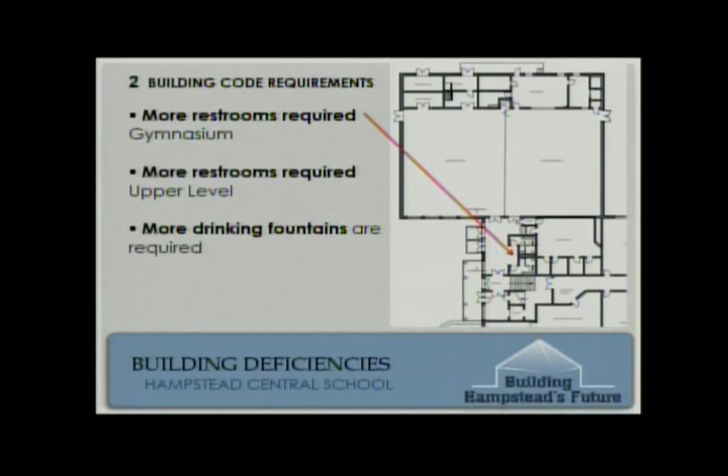The next phase under code requirements, we noticed that the restroom count didn't match what is required for today's standards, not only at the gymnasium, but also on the upper level of the school. And there are drinking fountains that are required.

Another thing under building code is that there is a known structural issue in the school. It's in the library, and it's been monitored over the years, but it continues to move. We put in another monitoring device just to be able to see how much movement we were getting, and we got some extra movement this year when the snow hit, we got some snow loads on it. But that's something that really needs to be repaired.

Hallways in the school are not currently up to fire code requirements. There really needs to be a fire partition on all hallways, and the doors need to be changed out to create a fire barrier, with door closers installed. So we're looking at a lot of money for things that aren't flashy and don't help educational needs, other than keeping our students safe.

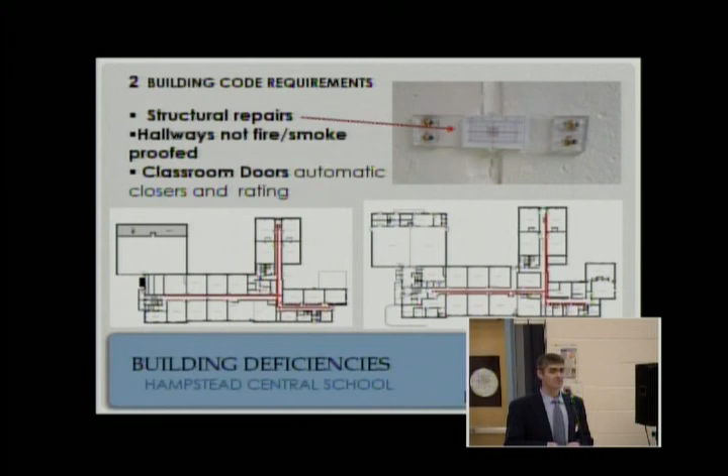In the 60s wing, building efficiency was a big concern. That entire wing is built off the back of the school, and it's uninsulated CMU, just a 1-foot thick piece of concrete between you and the outside. In summer it's hot, I was up there one day and it was 95 degrees in the classroom. In winter it's really cold, getting down into the 50s at night. They've been putting a lot of money into heating those spaces so students can be somewhat comfortable, but you still get drafts during the day.

Along with that, the roof needs to be replaced. The windows also aren't energy efficient, and you can get drafts off of them. There are stories of leaving a glass of water on the windowsill and finding it frozen the next morning.

Also under building efficiency, the portable classrooms are really thin-walled structures, so they're very expensive to heat, especially since each one has its own little heating system.

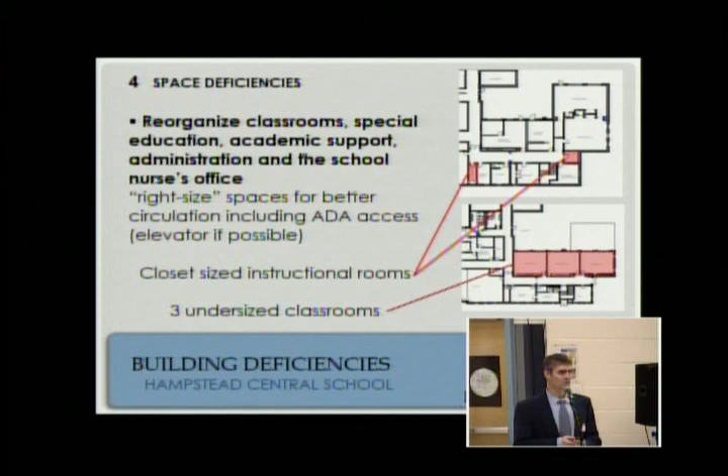Also, being able to reorganize the school so that currently the second grade is split between the upper level and the main level, and there isn't a lot of cohesion with the second graders. So being able to reorganize the school so that all class grades are together in one location, or as you work around the school, they're together.

Another space deficiency is how the circulation works for the drop-off and pickup. The portables in the back are in the way, so when the portables are moved, it frees up a lot more room for a much cleaner way to be able to drive back there, park, and pick up the students.

So the process kind of starts blending into what are the solutions to the deficiencies that have been found in the school. And if you've been in the community for a long time, you remember that since 2005 there has been a campaign to try and improve the school. I was able to pour through a lot of those reports from 2012 or 2010 through 2016, and nothing has changed in a lot of those documents.

Some things have been upgraded over time, but we went back and looked through all those conditions reports to see what was suggested then and what needs to be done today. So then we did our own facility assessment, and it brought out the items I just pointed out, but there's actually a whole list of a lot more items that are pretty much building code items.

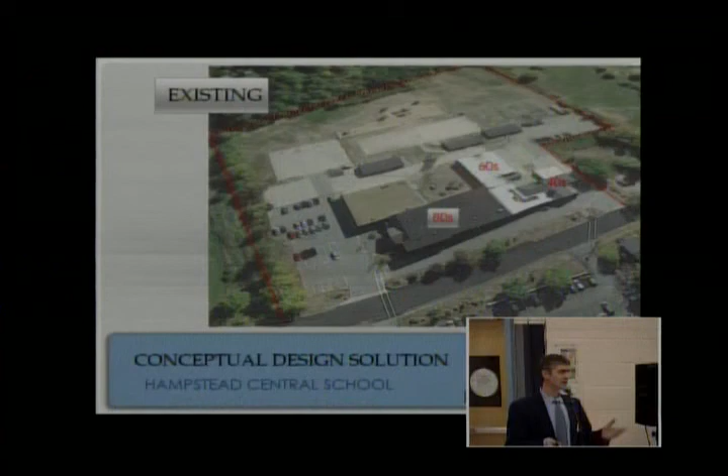So again, to orient you on the site, we have the 60s, 80s, and 40s wing, and this next slide shows the new components. In building new, what we came up with was taking care of, number one, the main entry. The main entry and administration is moved down to the front part of the school, and that's a new building component, about 2,000 square feet.

In the back of the building, because we wanted to do as much work in one location as opposed to building a number of different pieces around the existing site, we built in a library with 2 classrooms above, because then we can reutilize the existing library for classrooms. And then we brought the music out of the portables into the school and utilized a way to have the cafeteria and community room built off the backside of the gymnasium so that the existing kitchen can be used in the community room. So we're not building a whole new kitchen, it's just the new community room space.

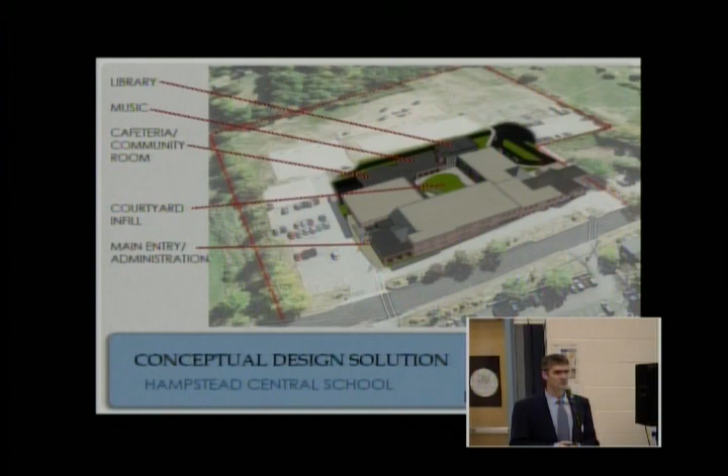And to orient you here at the front entry, you can see this is the new administrative and entry area.

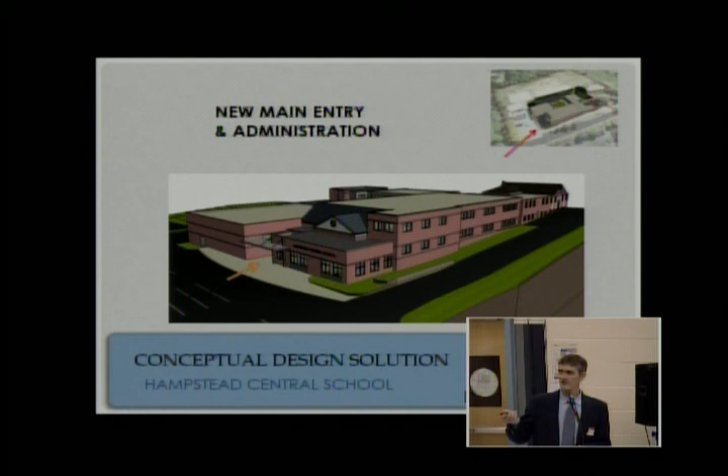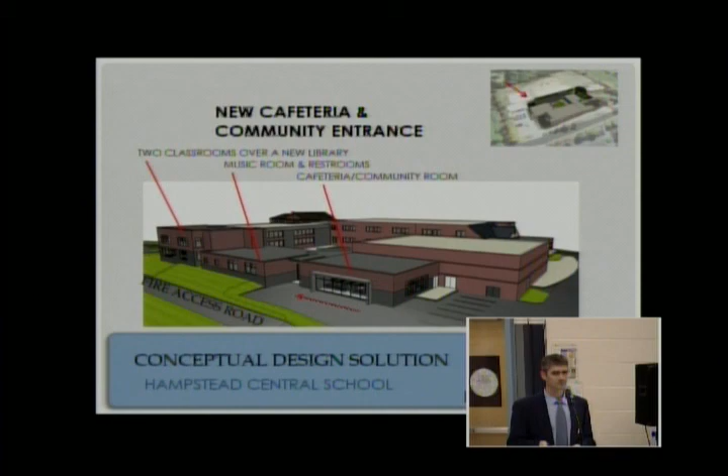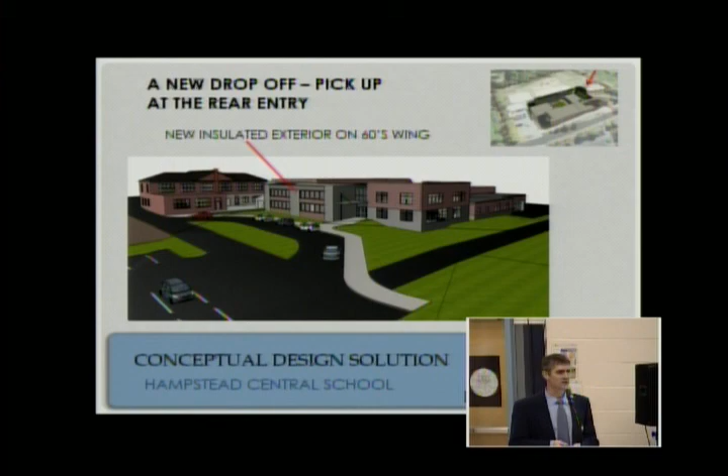This is the back of the building. On this site plan, here's the library with the 2 classrooms above, and the community room and music room that stretch across the back. We've proposed insulating that 60s wing so we can put a new skin on it. The interior is in decent condition and the square footages are right. It's just a matter of making it all look like it goes together, insulating that wing to make it energy efficient, and replacing the windows. Also, the rear drop-off has been reorganized so it looks and feels more like a drop-off, not just a paved area with painted lines.

In terms of new construction, this slide shows the new components in color. At the top of the screen, you can see those 2 classrooms - this is the upper level. There are 2 4th grade classrooms added to the back, right over top of the library, a set of bathrooms, a music room, and the community room. You can begin to see a big, circular path through the school. We have to put in an additional elevator, and in orange here, you can see the new front entry, which now blocks off and creates a controlled access point to get into the school.

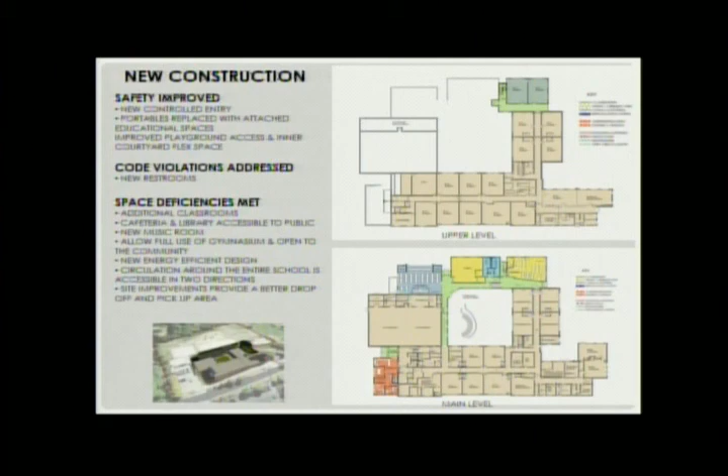So what we've improved here is the safety, the code violations, some of which were restrooms, and we've addressed the space deficiencies with the additional classrooms, the cafeteria, the library, and the music room. All of this leads to a better learning environment for the school, but it also lets the community utilize these spaces, because we've picked up this courtyard space with a little amphitheater, which would be a nice function space not only for students but for the community in the summers.

This slide shows the areas that are remodeled. It's kind of hard - the remodel really goes throughout the entire school, but these are some of the larger components. You can see how we've put a new skin all the way around the 60s wing, split the 3 small classrooms to make 2 appropriately sized classrooms, and divided the library in 2, where it was originally divided, which takes care of the structural issue. We have some structural issues to take care of directly underneath that in the lower level.

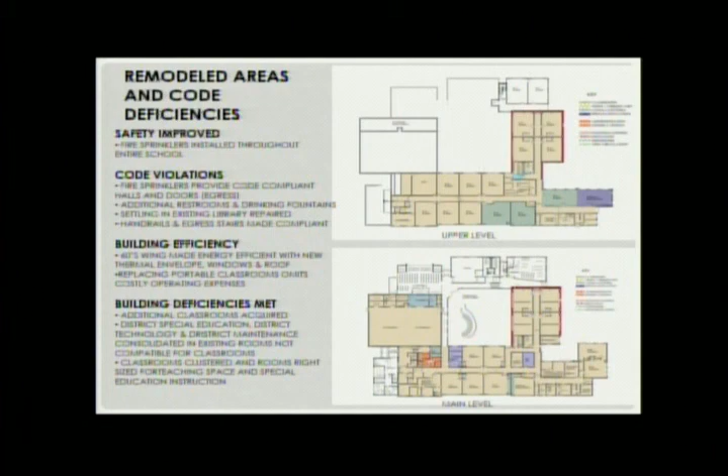We have the nurse's room, the kitchen for the cafeteria - these are spaces that get remodeled in the new plan. We've taken care of a lot of the safety improvements because of the fire sprinklers and code violations. Hallways are now appropriately safe so they have good access to the school. The building efficiency is addressed, and there are all of those different space constraints as we right-size the rooms.

These are some of the blow-ups, bigger pictures of the new building components. You can see the library with a hall access that connects different parts of the school, from the 60s wing all the way through the gymnasium and back to the 80s wing and the front entry. Then you've got this community room, and in the community room there's a back piece that can be converted into a stage. So it's not just a cafeteria that the kids use - it's actually going to have the feel of a nice community space you'd want to utilize.

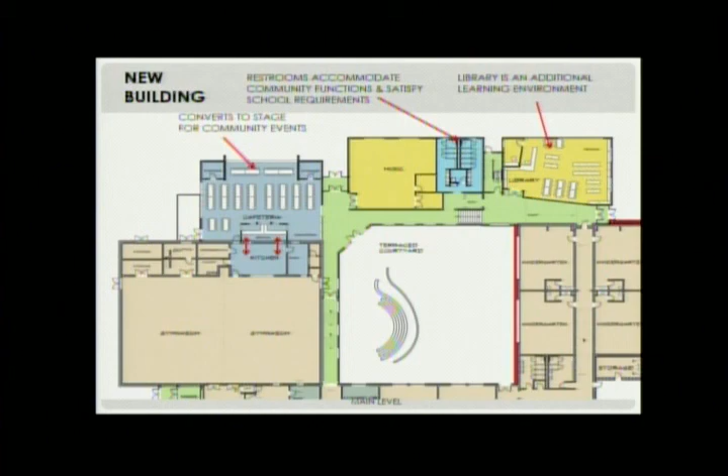Restrooms were added, which took care of some of the restrooms we would have needed to remodel in the front of the building, but those have been added to the back instead. The new main entry is our secure access point - once you come into this front entry, the administration can see who's entering the front door. They can see back to all of these different hallways and control access throughout. It also brings good conference space for parents coming in for meetings.

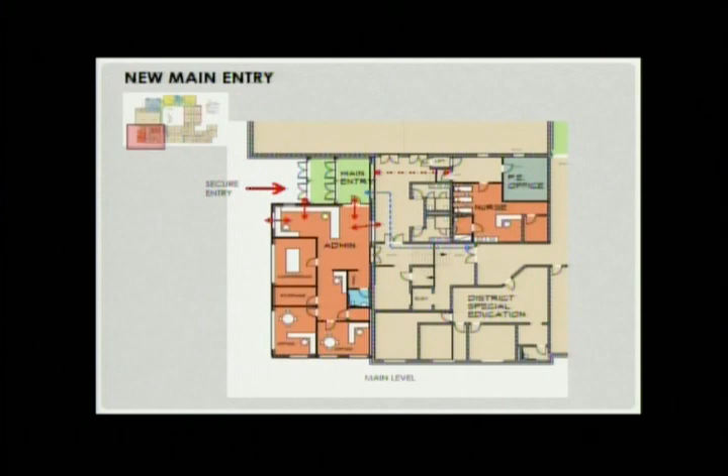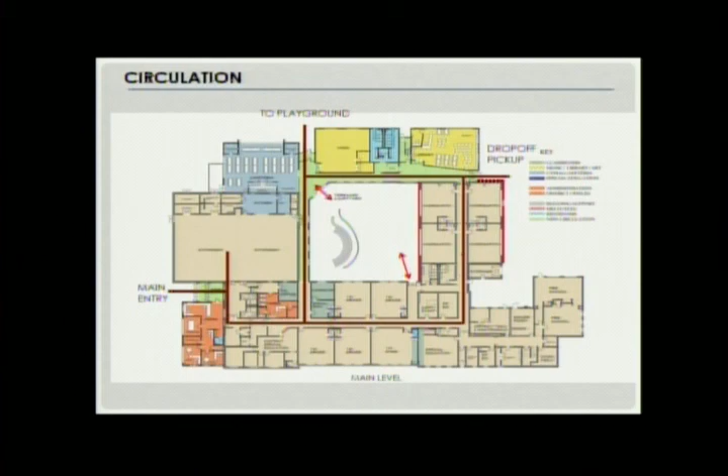Circulation, I spoke about that before. We have a lot of circulation, so there's more than one way to get around the school so you're not disrupting other classes.

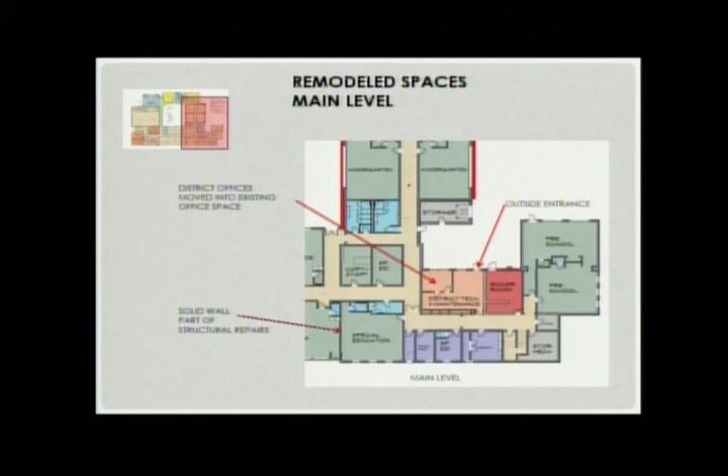We have remodeled rooms, and this is on the main level. We've brought in the district technology and district maintenance. They have their own outside entrance. We've been looking at remodeling or repurposing, reusing some of the special education space so that it works better for them.

Those are the 3 classrooms that are undersized. They get split into 2 classrooms, one used as a classroom, the other for special education. We have the new classrooms up here, which are part of the 4th grade.

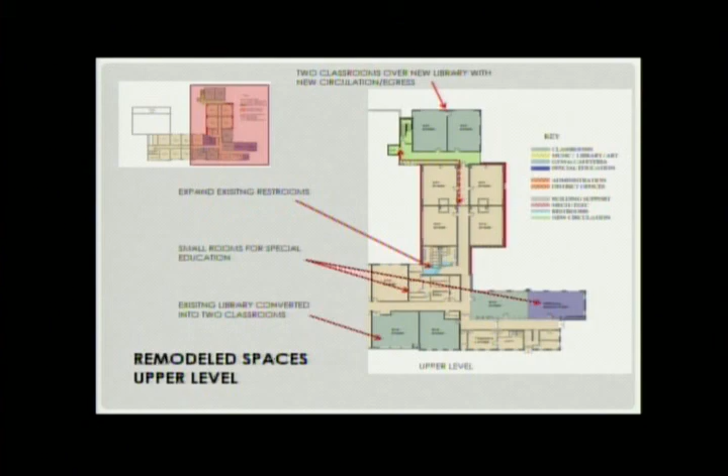To summarize, what this plan provides: in the new construction, we have the cafeteria, community room, a library, a music room, we've added 2 new classrooms, the administrative area is new, and the main entry is new. Under the remodel, we are addressing the 60s wing, which is really not very efficient.

There are additional classrooms, special education, and academic support gets moved around, but into contiguous pockets, so that they can be in the right place of the school to serve the best needs for the students. District offices have been brought in. Nurse's office has been brought into a new location that's closer to the front entry.

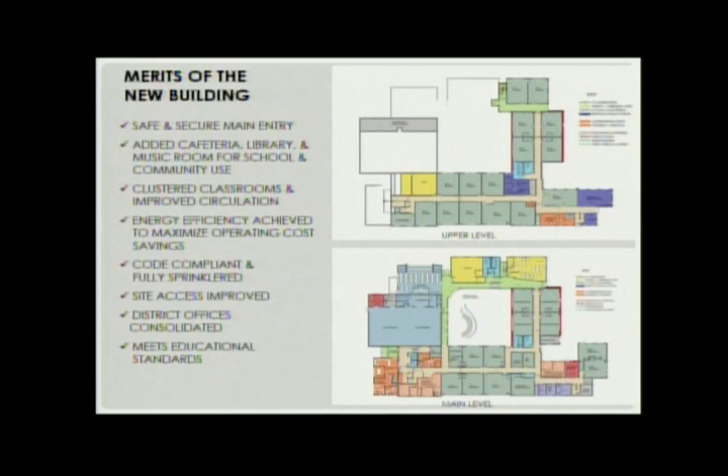It's now energy efficient. We've achieved savings for the operating costs. It's code compliant and sprinklered. We have improved the site access. District offices have been consolidated, and it meets the educational standards.

I spoke a little bit about the building efficiency, but we wanted to look and see, okay, how have we actually improved it? If we take just the portables, they cost about $1 per square foot per year to heat and cool, because they have AC out there. The portables are fairly expensive to heat and cool. The existing building is about 50 cents a square foot to heat.

After we take away the portables and improve all the thermal envelope, the improvements reduce that to 40 cents a square foot for the entire school. All of that to say that it's going to be more cost effective, it's going to cost less to heat the school after the building improvements have been done. So even though we are adding more square footage than what's currently there, operating costs in terms of heating have gone down.

When we look at the numbers, our budget is $7.4 million. 6.4 of that is what we call hard costs - those are the construction costs. There's the demolition, the new space, the renovation, the site work. Then there's soft costs of $750,000, which are the architectural and engineering fees, project management fees, furniture, furnishings, and equipment, and technology commissioning.